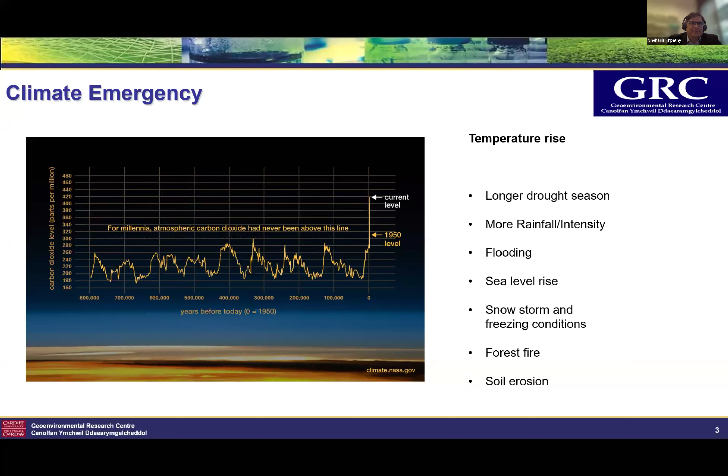There are many reports available which provide crucial information on the temperature rise. In the IPCC report in 2018, the suggestion made was to limit global warming to 2 degrees centigrade and make serious efforts to limit the rise to 1.5 degrees centigrade. So that's the document that we refer to. But if we take a look at the current temperature data and statistics, the average overland temperature has gone up by 1.59 degrees centigrade, and average over ocean temperature is up by 0.88 degrees centigrade.

This clearly indicates that what we do or have done in the last 7 or 8 years has little helped the targets. Some reports even mention a shift in the temperature limit to 2.5 degrees centigrade, and efforts should be made to limit the rise to 2 degrees centigrade by 2050. If the rate of increase in CO2 emission continues, which is about 38 billion tons per year, then we could be emitting 75 billion tons of carbon dioxide per year by the end of this century. And the CO2 level, which is currently at 422 ppm, can go up to 800 parts per million.

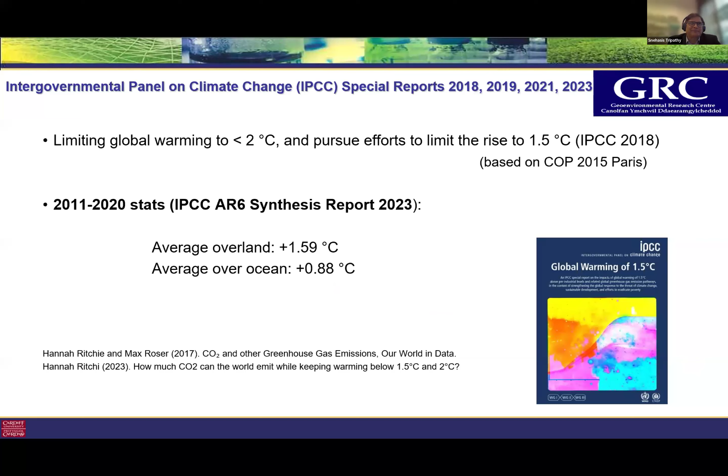So IPCC has recommended a three-way approach, and many of the energy geotechnics topics are under the first two approaches. A reduction in CO2 may be achieved by using renewables and minimizing the use of non-renewables. CO2 sequestration can be done in ocean, coal seams, rock, oil and gas reservoirs, aquifers. The third aspect, which is extremely relevant, is: if everything fails, then what are we going to do? We need to learn how to live. So that aspect is known as the adaptation aspect. And in this aspect, obviously the contribution from engineers, particularly geotechnical and geoenvironmental engineers, industry sectors, sociologists, media, and economists will play a vital role to minimize the climate change impact.

There are other efforts which may be made in terms of minimizing the generation of waste, reducing energy use, and more importantly, making lifestyle changes to keep fit in order to reduce the health cost. Published stats show the condition of countries with a low population. The countries that have a low population are generally doing well in minimizing the emission of carbon dioxide, whereas countries with high population struggle to implement the plans. In Wales, for example, out of 50 new projects planned recently, 35 projects were scrapped due to lack of adequate measures with regard to climate change.

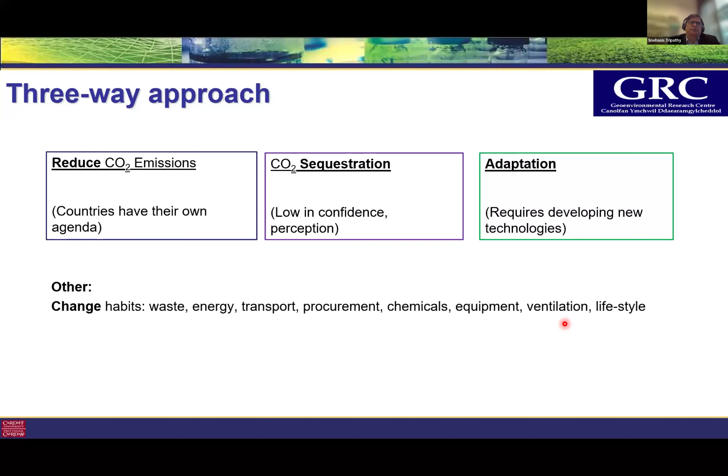So the figure on the left shows typical urban development and how the seasonal climatic processes would generally affect the pore water pressure changes and state of pore water during freezing conditions. The factors above and the factors below the ground are going to have significant influence in terms of engineering behavior of soils and the components of soil structure and infrastructures.

Longer drought season will cause drying of soil, as we all know, to large depths, accompanied by shrinkage of soils, which in turn may cause undesirable settlement. Desiccation cracks tend to generate weak planes for water seepage. Also, at very low water contents, the strength of soil may decrease significantly.

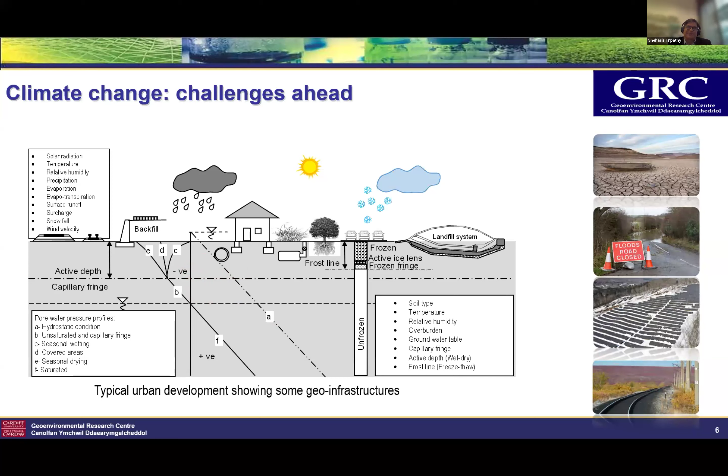What you see here are a few adaptation technologies which possibly have direct relevance to climate change and design of resilient geoinfrastructure. I have not included here the emergency preparedness aspects and many other technologies which are being considered as applicable to a variety of situations that we are facing currently. Sustainable urban drainage system is nothing but construction of underground storage tanks, which can minimize the flooding in urban spaces.

The figure you see here is an engineered barrier system. It's nature-based to minimize the flooding in urban spaces, which can either be implemented on top of existing infrastructure or on top of a new infrastructure.

There are significant research works ongoing at this stage in many countries for utilizing many different materials, including industrial waste. Use of sustainable and nature-based materials is certainly preferred over many conventional materials. So if you are planning to have any of these adaptation technologies which are nature-based, we must test all these materials to see whether they can cope with the changing climate.

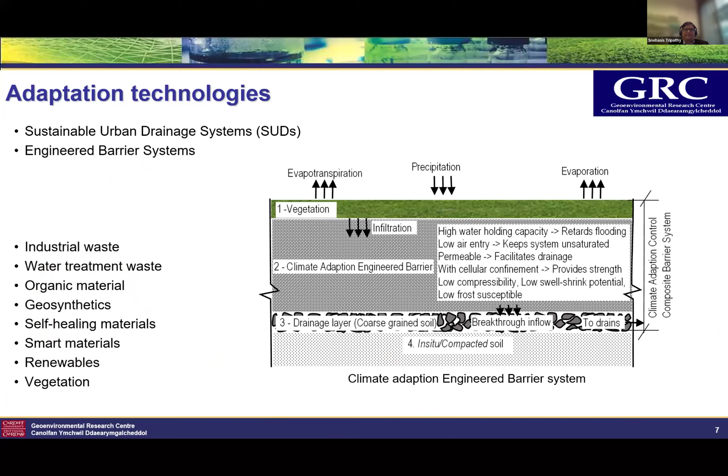In each of these processes, that is wetting, drying, freezing, and thawing, the severity may vary as well. For example, partial saturation, partial drying, or full drying, full saturation, or partially frozen conditions, etc. So the severity may vary. So you can have a number of different combinations of these four different seasonal climatic processes.

What you see here are some references with regard to the behavior of soils due to wet-dry and freeze-thaw cycling. My apologies for not presenting many other important references in these lines of research due to the availability of space.

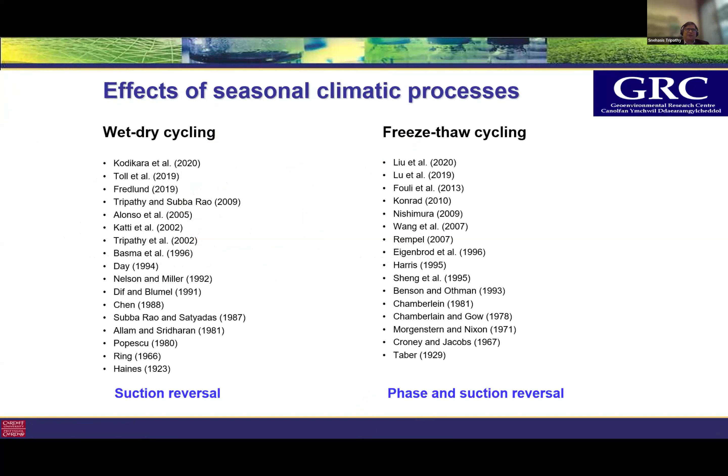Cyclic wet-dry tests obviously mimic the weathering patterns in summer and in a rainy season. They can be performed in the laboratory by controlling temperature, or controlling suction, or controlling both temperature and suction. Of course, testing can be done in a more expensive triaxial testing environment to replicate or mimic the wetting drying conditions for different soil types under different stress and hydraulic boundary conditions.

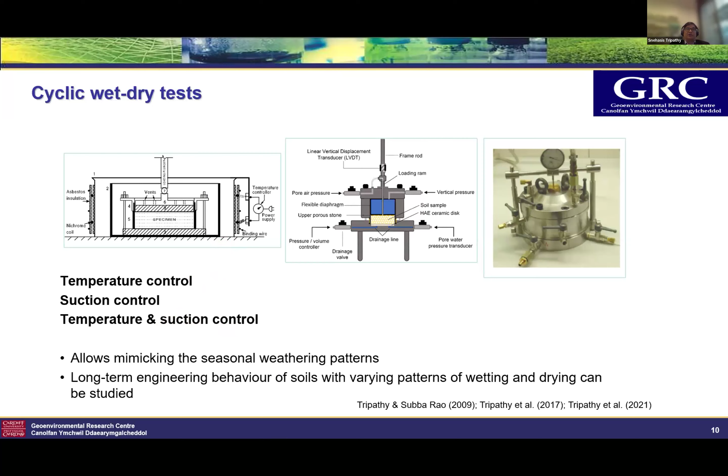Here is a soil sample which was subjected to cycles of wetting and drying, and the drying was a full drying, and the water content at the end of the drying cycle was less than even the shrinkage limit. The sample attained an equilibrium with a vertical strain of 14.3%. So the interesting thing to note here is that the swelling magnitude is 14.3% and the shrinkage magnitude is 14.3%. So that is called an equilibrium being reached.

Then the drying pattern was changed to a partial drying pattern. The soil exhibited equilibrium swelling and shrinkage strains immediately. The full and partial drying patterns were then repeated in the next two stages. The results again show that if a soil has experienced a severe drying pattern in the past and has attained an equilibrium, a lesser drying would result in an immediate equilibrium state being reached. What these results show is that it would be prudent to test soils alone or soils along with other components to explore how they would respond to climate change.

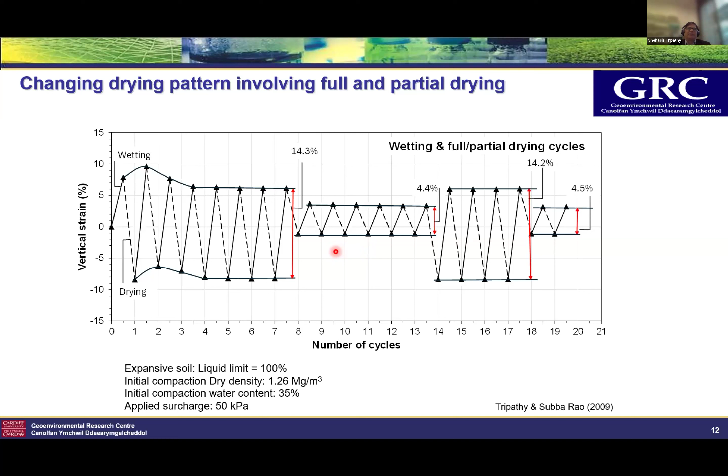Here it is a cyclic freeze-thaw test. Frozen boundary conditions can be imposed by controlling temperature at one end of the sample. Of course, this time it's negative temperature. So we need to take the temperature down below 0 degrees centigrade to freeze the sample or to create the frozen condition. This can be achieved by circulating cold air or oil at desired temperatures in a non-contact mode. Also, some researchers have used a metal plate whose temperature has been lowered to any desired temperature.

The important points to note in this kind of test are that the test may be performed in an open system. That means the soil should have access to water during the freezing cycles. The other point is that when we lower the temperature, then at one end of the sample, water turns into ice and frictional resistance gets developed. It is not easy to get rid of the frictional resistance, which is also known as the adfreezing effect.

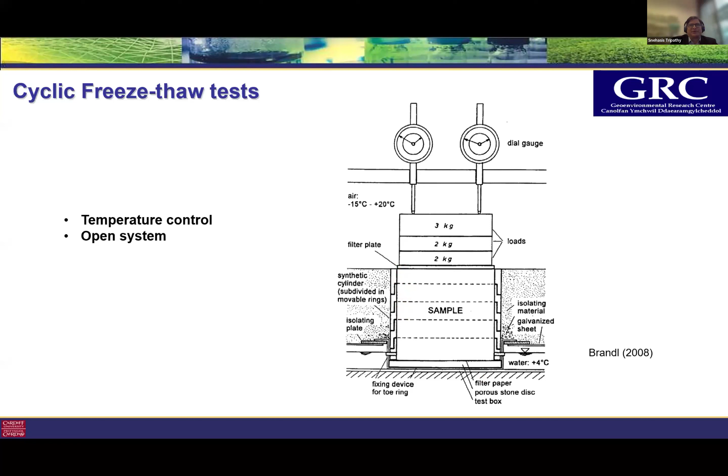I will now show you some cyclic wet-freeze-thaw-dry test results performed in Cardiff on various materials. The research was performed in line with climate adaptation engineered barrier system requirements. It is very difficult to implement all the seasonal climatic processes in a single test setup. One would require sensors which perform well in both positive and negative temperatures, talking about positive 30, 40 degrees centigrade and negative, probably minus 20 degrees centigrade. So we need to use sensors which will operate in these harsh temperature conditions.

So one is sitting inside the other. At the bottom, we have got a water reservoir, which is a cylinder, and it's resting, allowing the porous stones to rest on top of it. And we've got a soil sample with a cooling heating chamber. This is basically a closed cylinder, having some vents at the top to which a vortex tube has been connected. The role of the vortex tube is to change the temperature at the top of the soil sample.

So air pressure can be fed into the vortex tube, and on one side you can get cold air, on the other side you can get warm air, and you can use cold air to freeze the soil sample, whereas the warm air can be used to dry the soil sample.

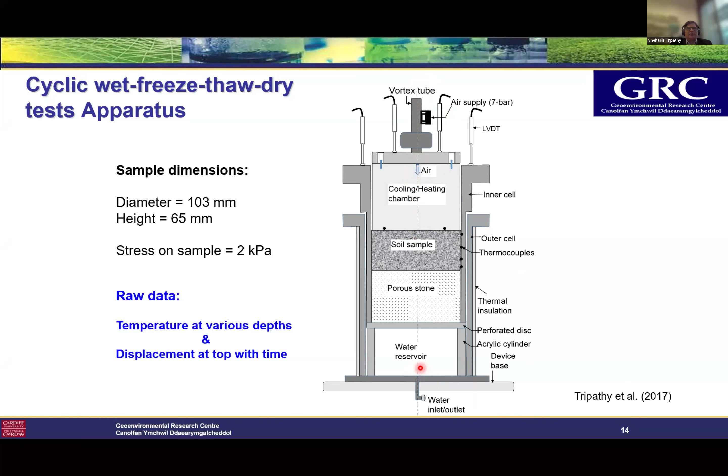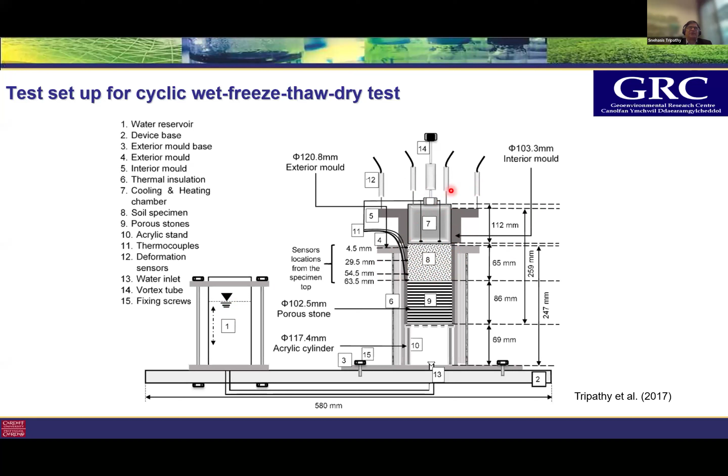The water reservoir below, you can see here in the next figure. This is the entire test setup. This is the part which I showed you in the earlier slide, and this is a water pot which is connected to the water reservoir such that the water level in the pot can be varied depending upon what kind of hydraulic boundary conditions you want to achieve. It looks complex, but it's quite a simple system. Basically, when the soil freezes here, this inner mold gets lifted off, and you can actually read the deformation of the soil sample under a low stress of 2 kilopascal.

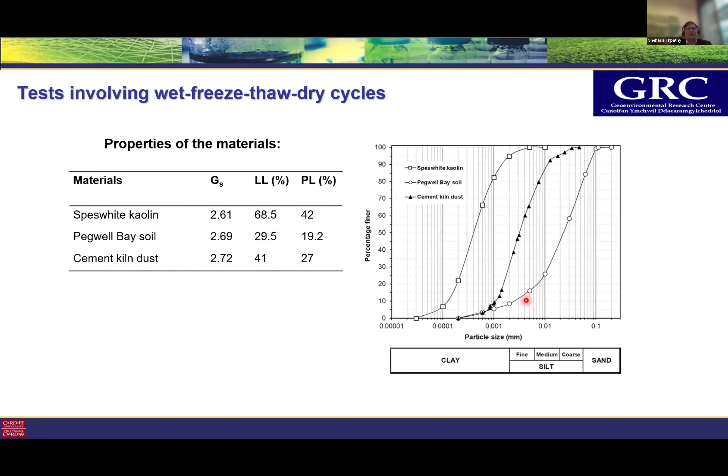Three materials I'm trying to show here. One is Speswhite kaolin, which is a clay, Pegwell Bay soil, which is a frost-susceptible soil from England, and here we've got a cement kiln dust, which was brought from a local cement company. You can see the liquid limits here. Speswhite kaolin and cement kiln dust, you can see the grain size distribution here. They can be considered to be very fine materials, whereas the Pegwell Bay soil grain size distribution here contains a little bit of sand as well.

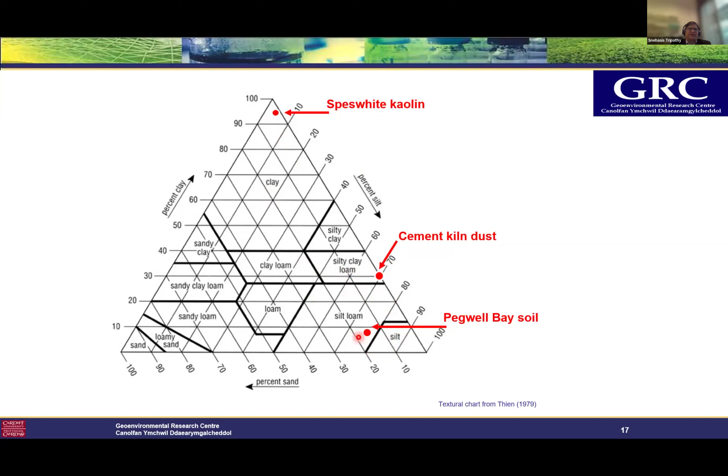Here's the textural soil classification chart, and the materials which were tested are shown there. The positions are shown there. Speswhite kaolin is in a clay range, and a silty clay loam here, and then you've got a silt loam, which is the Pegwell Bay soil.

It's okay. Okay, and done. Okay, great.

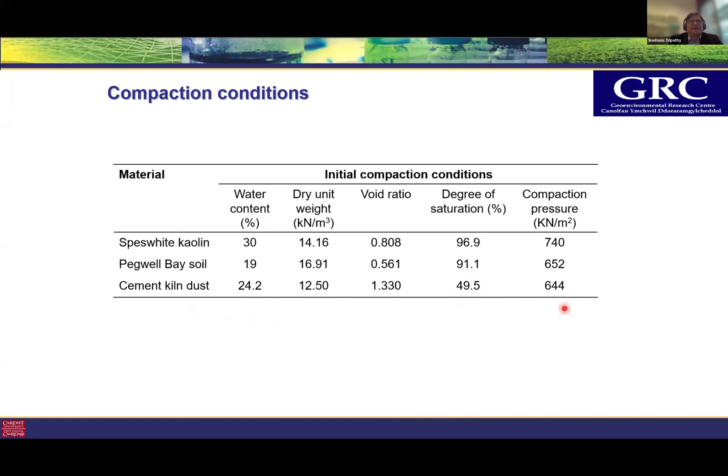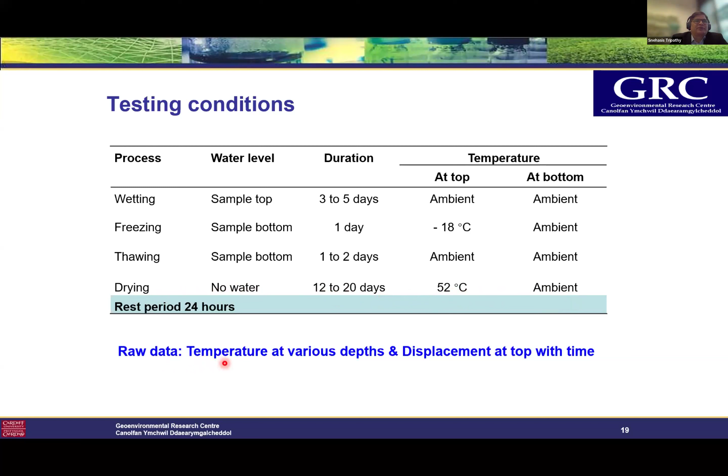Thawing occurred at ambient temperature. It took about 1 to 2 days. During drying, no water was supplied, and it took about 12 to 20 days for different materials. The temperature at the top of the soil sample was plus 52 degrees centigrade, and at the bottom, it was ambient. Raw data collected during the test are temperature at various depths and displacement at the top with time.

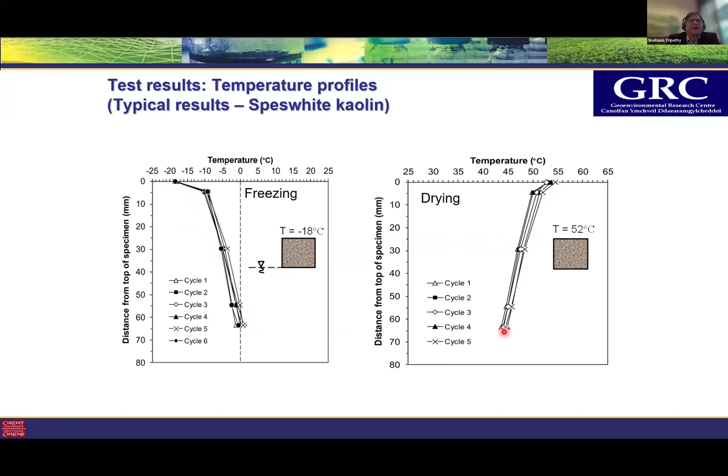Just typical results on Speswhite kaolin temperature during freezing cycles and during drying cycles. At the top of the sample, the temperature was minus 18 degrees centigrade, and water was supplied to the bottom part of the sample. As you can see, even if you have a temperature of minus 18 degrees centigrade at the top, the temperature goes towards positive when you go deeper into the soil. Similarly, during the drying cycles, 52 degrees at the top, and at the bottom you get about 42, 43 degrees centigrade.

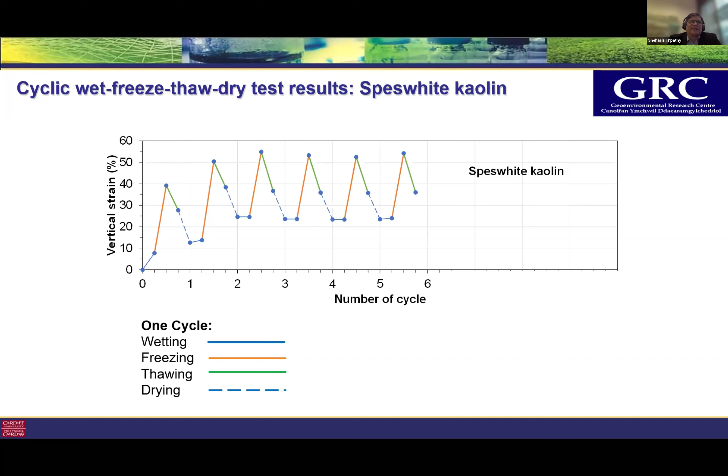The conclusions that can be derived from these test results are that materials attain an equilibrium state with increasing number of wet, freeze, thaw, and dry cycles. At equilibrium, volume change due to wetting and freezing is equal to volume change due to drying and thawing. Also, plastic deformation can be noted in all the cases. So basically, the materials are gaining volume.

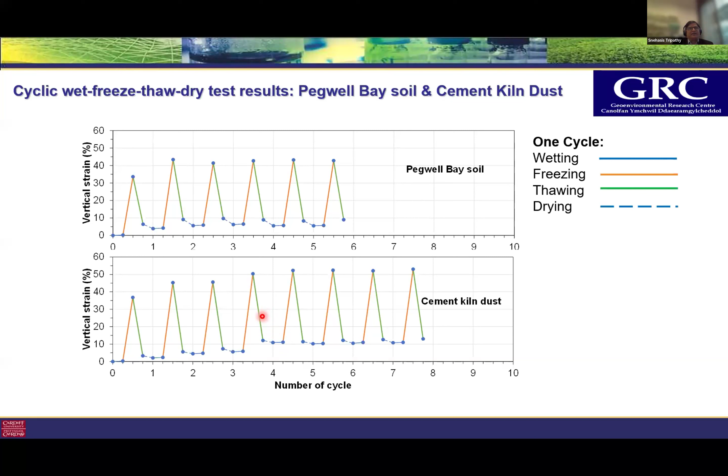The other important thing to note here is that materials which did not exhibit any swelling and shrinkage strain during wetting and drying cycles can exhibit frost heave and thaw settlement. Now, this is very important, since simply using industrial waste without checking their response to various climatic processes may not be ideal for designing resilient geoinfrastructure.

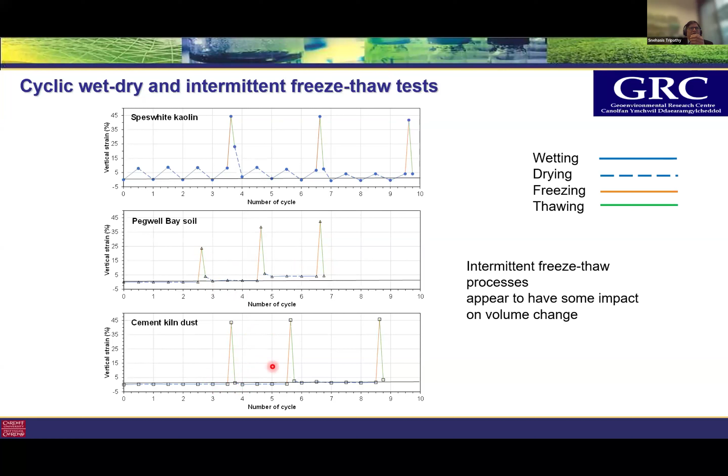As you can see, for Pegwell Bay soil and cement kiln dust, there is very little swelling and shrinkage, but they affected the frost heave and thaw settlement. In the case of Pegwell Bay soil, the frost heave increased with cycles, whereas in the case of cement kiln dust, there's a kind of stability. There is not much effect of wetting and drying on the frost heave and thaw settlement.

Well, climate change tends to destabilize the equilibrium conditions attained by soils and geomaterials, and hence you can expect geoinfrastructure to be really stressed due to this changing climate. There is a need for the development of adaptation technologies, and the efficiency of geoinfrastructure and adaptation technologies needs verifying by considering the impact of climate change.

The cyclic wet-dry test and wet-freeze-thaw-dry test in various combinations, depending upon the weather pattern at any particular place, may provide some interesting information with regard to how soils and soil compositions are going to respond to the different climatic processes. And also, you should be able to extract the shear strength and permeability changes that are going to happen due to the volumetric changes.